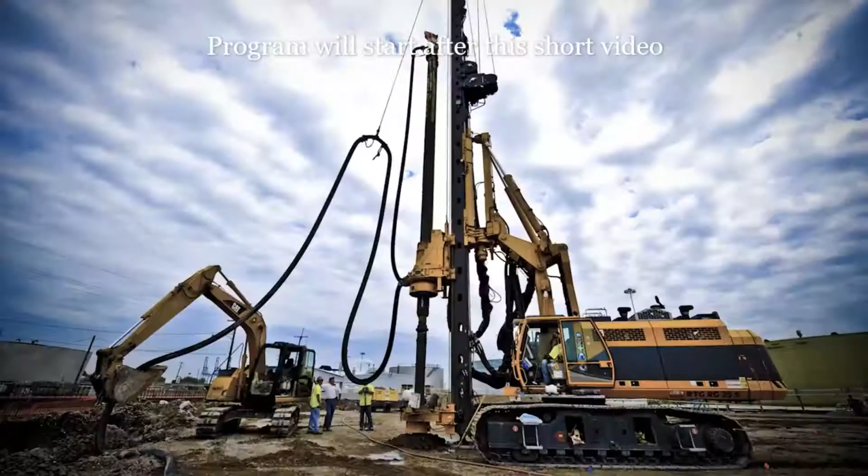It was about geotechnical engineering. With the engineering, I felt like I could actually touch the soil. And then after I got into a lab and got to go out on drill rigs, it was so much based on experience and what you have seen and how that soil behaves. It's not going to be the same every single time, and so there's always a challenge with it.

It's a great industry for people who like new things that pop up underground and who can deal with changes as they happen. So it's rewarding and always full of new things.

We definitely get the opportunity to be designer and builder all in one, and not everybody has that offering. Not every engineer has that ability in the pathways that they choose.

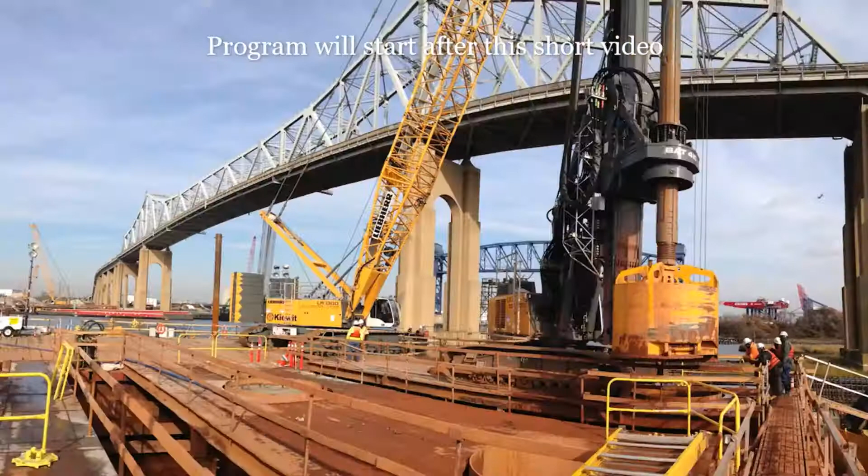It's very satisfying. Most of the work we do is never seen, but it's still satisfying to drive over a bridge knowing that I've had a hand in constructing it, or looking at a high-rise building, any beautiful building, knowing that deep below the ground is my contribution to that structure. It's just a very satisfying feeling.

It's a very big industry, so you have a great opportunity to advance and to be able to move forward in your career and become valuable to the industry or the company you're working for.

What I like about soil is that it's sort of a mystery below the ground, right? You only get to see a little bit of it at a time and then try to interpret what's going on. So it's sort of a puzzle that you're putting together.

DFI continues to expand globally as regional chapters grow and reach more practitioners with content that meets local needs and goals. Regional chapter leadership is steady, and local staff are dedicated and enthusiastic, liaising productively with DFI headquarters.

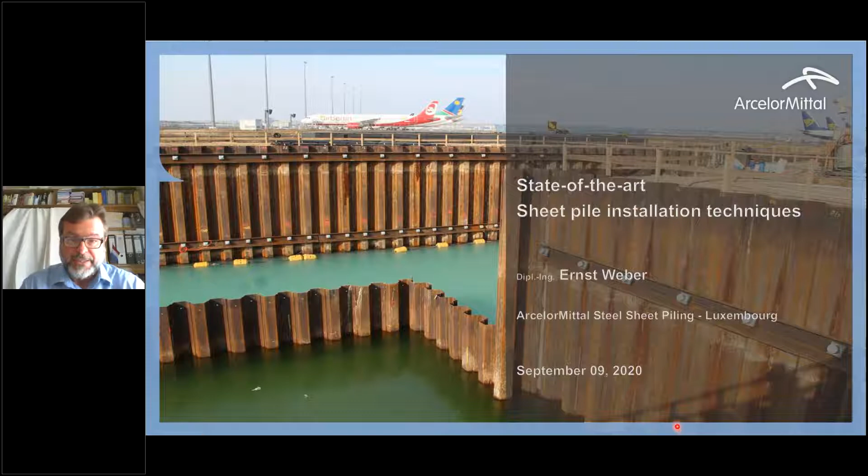Okay, let me just get the laser pointer. Hello everybody, our session today will be on the topic of state-of-the-art sheet pile installation techniques. There's quite a lot to talk about, so sometimes we will touch only the surface, sometimes we will go a bit deeper. I invite you to ask a lot of questions, or after the webinar if there is more to be clarified, just contact us, we will help you.

The picture we see here is a sheet pile job we did 2 years ago at Frankfurt International Airport. It was the construction of a new terminal, and because of very high water tables and changing geometries of the underground structures, around 3,000 tons of sheet piles had to be installed. Some of them stay in the ground, some had to be extracted about a year or two later to be reused on different job sites. That's a very important thing we will learn today, that sheet piles are very versatile and we can use them over and over again.

Just to give you a quick figure: every hour on every day, all over the world, around 1,000 linear meters of sheet piles are installed, be it new or used sheet piles, 1,000 meters per hour on average all over the world. That shows how big the use of sheet pile is everywhere. It's a very important construction product.

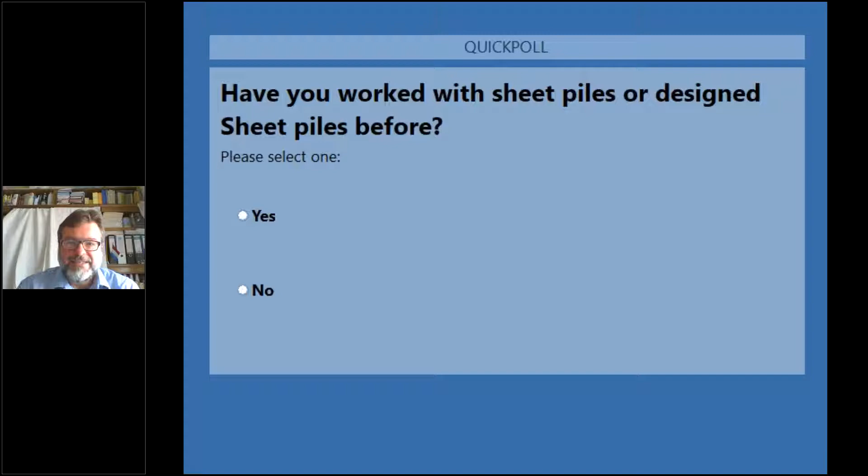That brings me to a very interesting question: who of you has ever worked or designed with a sheet pile? It's interesting to know what audience we have today. So I guess we will have an answer quickly. Okay, nearly 60% have already experience with sheet pile and 40% do not. Well, let's see that after this webinar, the number of sheet pile users will definitely grow. Thanks a lot for this quick poll.

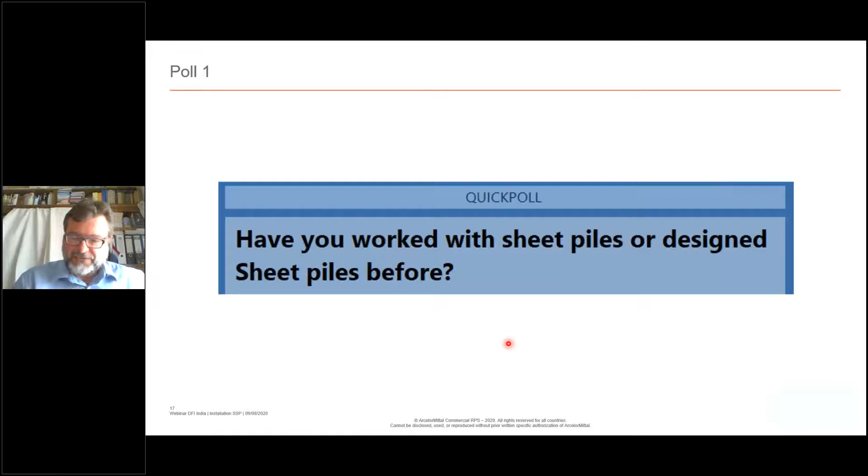Today, we are much more advanced. So when it comes to construction with sheet piles, the first thing we do is we calculate. We need to know what kind of section modulus, what length we need. And then the second important thing is the piles we have calculated must be installed in the ground. This can be just as challenging, or even more challenging, than the calculation of the project.

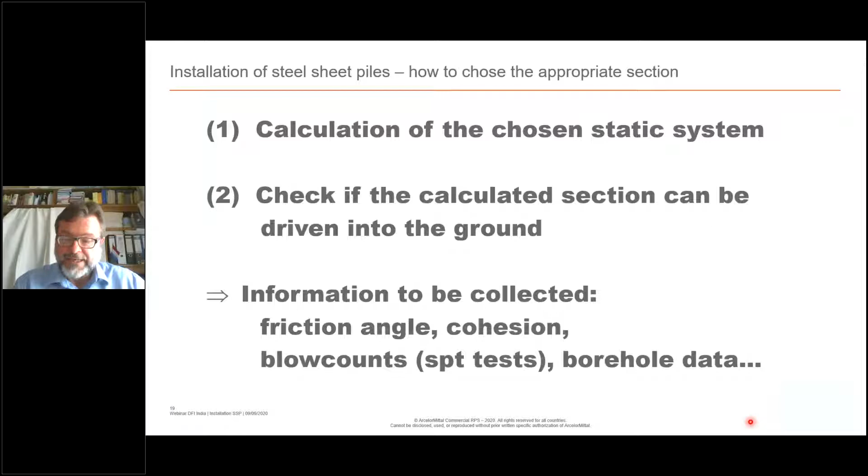So we need as much information as we can get on the soil, like friction angle, cohesion, SPT or cone penetration testing, borehole data. As much as we can get, to evaluate the right methodology and the right equipment.

Basically, we have two types of soil. One is granular soil, like sand and gravel. That's perfect for vibrating, because when vibration of the pile starts, the soil is more or less liquefied temporarily, and the pile slides into the ground. After vibration is finished, the ground settles again, and we have a pile that's fixed and will not move anymore. The other big soil type is cohesive soil, like clay, silt, silty sand.

That can be very challenging to install piles. Here, the use of an impact hammer is normally very good, or very strong normal frequency vibro hammers can also do the job. We can also install sheet piles in rock, but that's a different topic we will not touch today. We can do another seminar on that.

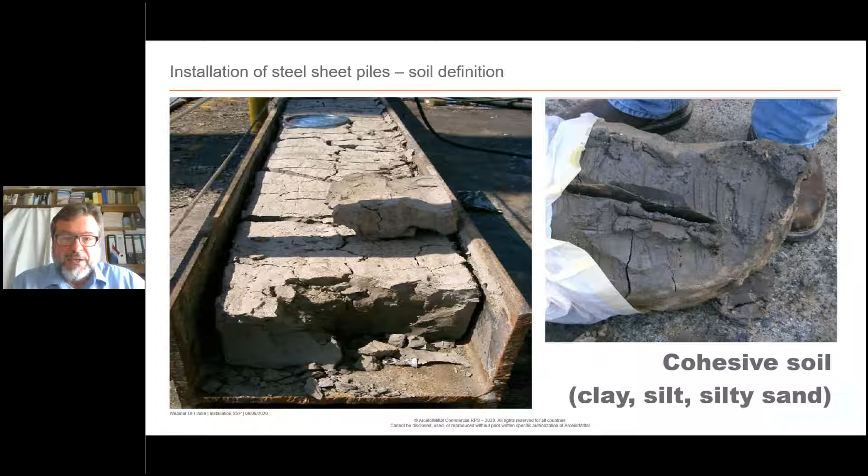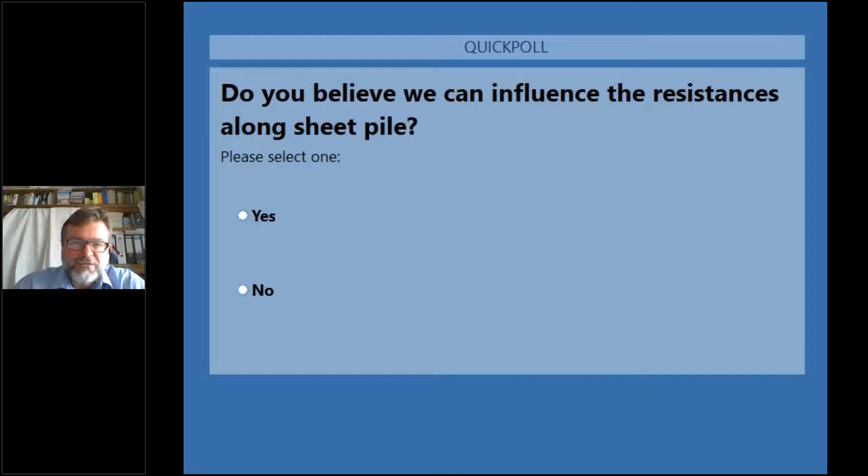As we already have 60% of participants with some sheet pile experience, let's see what the other 40% say. The interlock friction, the point resistance, and the skin friction of the pile — can we influence that? Do we have any chance? Let's see what the result is.

Oh, I'm very happy — nearly 90% say yes, around 10% say no. Well, yes, we can influence it. That's why it's so important to know the resistances, because we can work with them.

Point resistance — how can we influence the point resistance? For example, by choosing a single or a double pile. We increase the point or we make it smaller. We can do pre-drilling to break up the ground before the pile tip. This all reduces the point resistance.

Yes, we can influence it. Skin friction — can we influence the skin friction of a pile? Oh yes, we can, quite a lot.

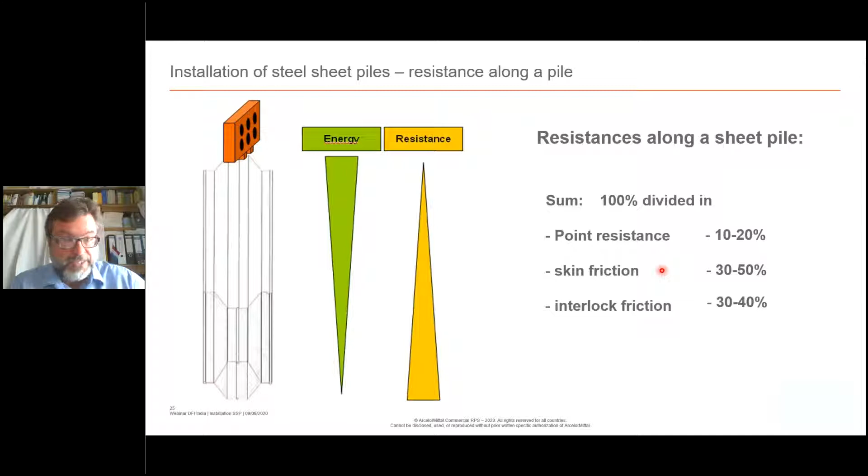We can go for a single or a double pile. We can do water jetting, for example, which is lubricating the ground, and the pile is sliding in with much less friction than if we would just drive it dry.

Then comes a very important point: how can we reduce the interlock friction? We can use grease, for example. Before piling, we just put with a little brush standard ordinary grease into the interlock, and this will help reduce friction quite a lot. We can use bituminous filling materials, or even simple soap can reduce the interlock friction a lot. So it's very important to know where the resistances are and how to deal with them.

When we go to actual sheet pile installation, around 70% today is done with a vibro hammer. It's the quickest way of installing. It's very versatile, you can use it everywhere, and the speed of execution is the big advantage. We had job sites where up to 100 linear meters of pile wall was constructed in just one day.

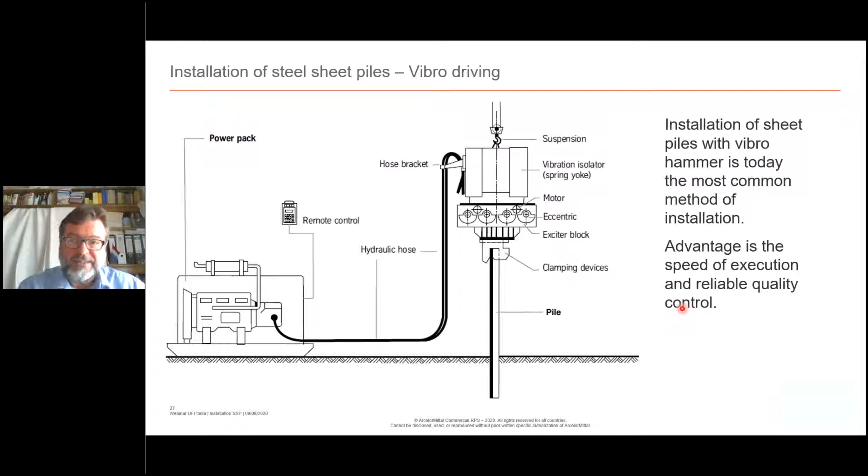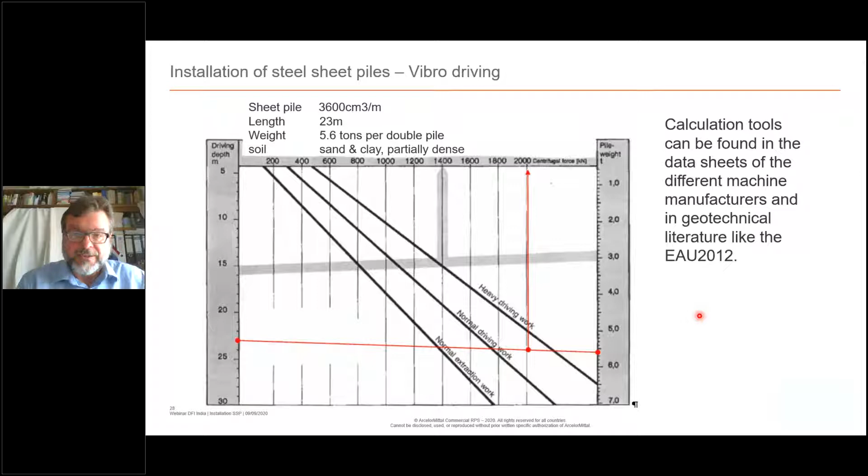For example, in the recommendations of Waterfront Structures, the EAU 2012 is the latest version. There are also recommendations on how to dimension the piling equipment.

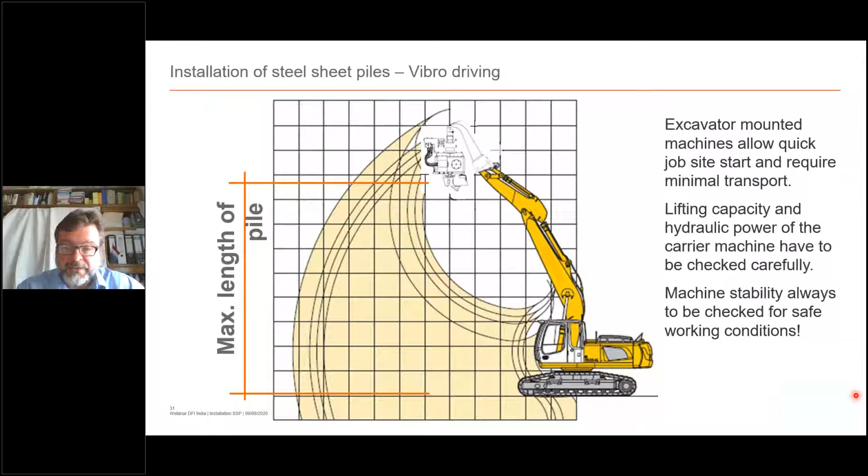And for sure, what always has to be checked is the machine stability, that we do not overload and the machine does not tip over. Safety is always the most important thing when it comes to a piling job site.

If we look at bigger job sites, then it can be very beneficial to use these telescopic leader rigs. We have here normally a high frequency hammer and a hydraulic mast that can develop a certain pushdown force.

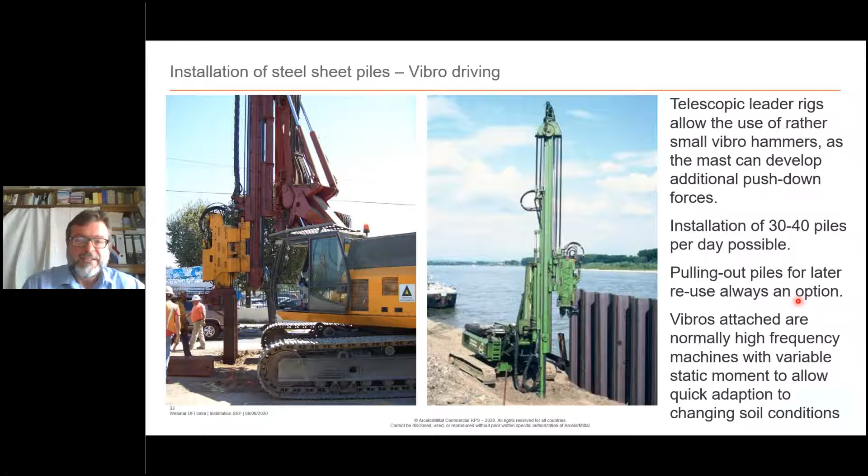This allows us to work with a rather small vibro, because the machine itself can give additional energy to get the piles in the ground. We had job sites where we installed 30 to 40 double piles per day. This machine has a crane equipped in the mast, so you don't need auxiliary equipment. Just one machine and 3 to 4 guys, and you can do 30 to 40 double piles per day easily. The high frequency vibro that's normally attached allows adapting quite easily to changing soil conditions. These are really state-of-the-art installation machineries.

That can be very important for the installation of huge anchor piles in offshore quay walls, for example. If we install the piles, it's very important that the guiding of the piles is absolutely accurate. As we've seen before, the interlock friction is a major part of the resistance along a sheet pile, so we have to make sure the wall is as straight as possible. If the piles are bent or leaning in one direction, we immediately increase tremendously the skin friction and interlock friction, leading to problems in the installation.

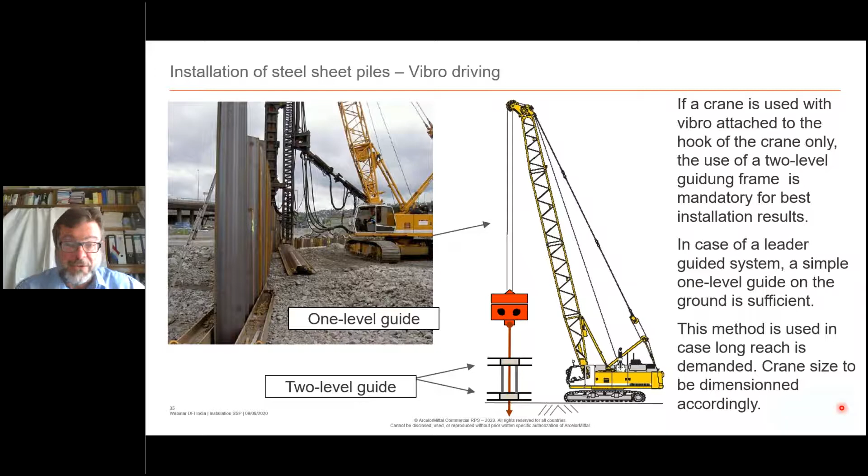Also very important is the crane dimensioning. When we work with a crane, we have the big advantage that we can work at a certain distance from the crane with the sheet piles. That can be, for example, when you work on a quay wall and have to reach out 10 meters into the sea—this methodology can be very good.

So what do we have to consider? We need to know the pile weight, the vibro weight, or hammer weight if we use an impact hammer. We need to know the weight of the guide frame, because that also has to be lifted by the crane. And we may have to consider combined lifts—we have a pile installed in the ground, but maybe in the wrong position, so we have to pull it out again. That's vibro plus pile weight plus soil tension, which has to be considered for the crane dimensioning.

Very important, but that's the good thing about sheet piles: we install them, and if we find out something's wrong, we just pull them out again. That's the only material that allows you to do so. For the crane dimensioning, it's very important to know the working radius—how far away from the machine we have to work with the pile and the vibro—because that's a big influencer on the size of the machine.

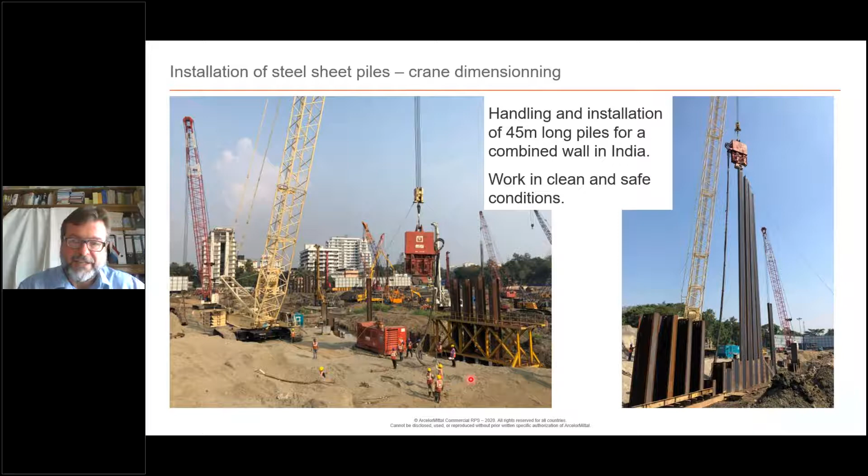This should move further now. Can you please go one slide further? Seems like mine is not. Okay, very good, thanks.

When we use an impact hammer, it's very important to use the fitting driving cap with it. We see here that's the counterpart of the clamp at the vibro driving. We have a helmet covering more or less the full shape of the sheet pile, but leaving out the interlocks, so we can work with this driving cap in between a wall. And if one sheet pile does not go down with vibro hammer, we can always switch to impact hammer driving, which will normally lead to full penetration of the sheet pile. Details can be found at machinery manufacturers or also at the sheet pile manufacturers.

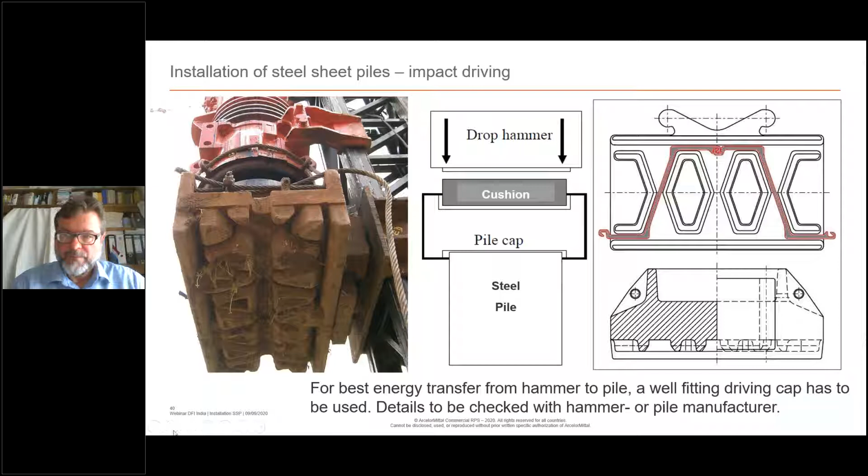Very important when you do piling is not only what material to use and what pile to use, but also when to stop. So we have to take a close look at the refusal criteria, which is clearly defined.

Can you go one slide further, please? Somehow my cursor doesn't allow me to do so.

We have certain recommendations, which is 5 minutes for continuous vibrating of a sheet pile. If the pile is not moving down after these 5 minutes, then you should stop piling. If you go on, there is a risk of damaging the pile or the machine. What can you do? Well, get a bigger vibro or move to impact hammer driving.

When we move to impact hammer driving, there is also a refusal criteria: 2 centimeters per 10 hammer blows. If you have reached that, it's a technical limit, and you have to check where you are. If you are only 5 centimeters away from your pile driving objective, then you have reached the technical limit. That's okay. If the pile is still sticking out for 2 meters, you have to get a bigger hammer.

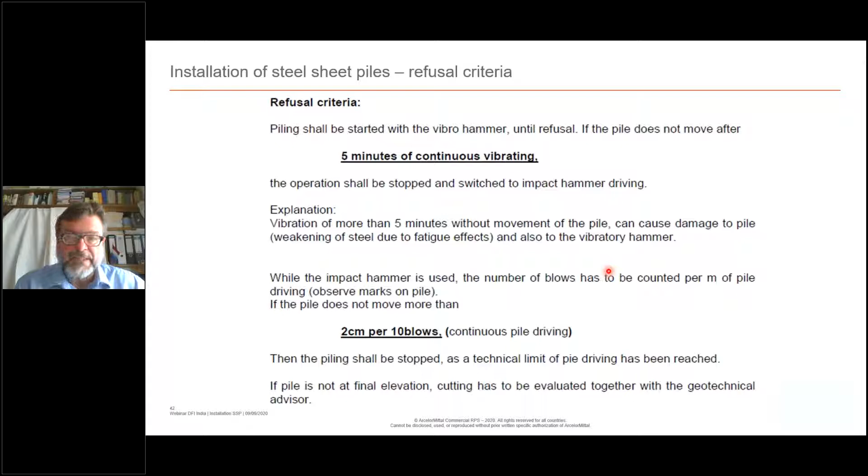Or you have to think of water jetting or pre-drilling just as an installation aid to get the pile down. But very important, if you go on with hammering and the pile is not moving, you will destroy the pile head, or worst case, the machine will face a problem. And very important, when you do a mix of these installation methodologies, always use vibro first and hammer last. Never the other way around, because a hammered pile is really sticking in the ground and you will not be able to move it again with the vibro.

Installation with low vibration is a very important topic today. In the old days, everybody assumed that sheet pile installation came together with very heavy shaking of adjacent buildings, but that is technology 30 years ago. Today, we have hydraulic pressing systems.

When we take a quick look into the historic development, we see that the first press was already constructed in 1958. It was Taylor Woodrow's Pilemaster that came into the market at that time, so already quite an old and proven technology. At the time, they had a pressing force per cylinder of 229 tons. Just to compare, today we are working between 80 and 120 tons. It had a stroke of 70 centimeters, which is quite a lot. It could work with single Z and U piles, pile width 500, 600 millimeters, which was the standard in 1958. And we had a machine weight up to close to 12 tons. It was working free hanging on a crane.

How is the pressing system working? That's what we see here. Basically, when we start, we have the weight of the machine and the weight of the panel of sheet piles that is to be installed. To overcome the resistance in the ground, we have to mobilize all these weights together, and we start pushing with 2 cylinders, normally starting in the middle.

We push the piles into the ground for 50, 60 centimeters, and we have the counterweight of the sheet pile panel and the machine that is giving the reaction force. Then we go on with the next 2 piles. The system should always be symmetric to make sure that we don't have any leaning in whatever direction. And the deeper we go, the more friction we develop along the pile. So this additional friction is also adding up resistance, so that the deeper we go, the pile is held by the ground more than by the machine and the weight of the other piles.

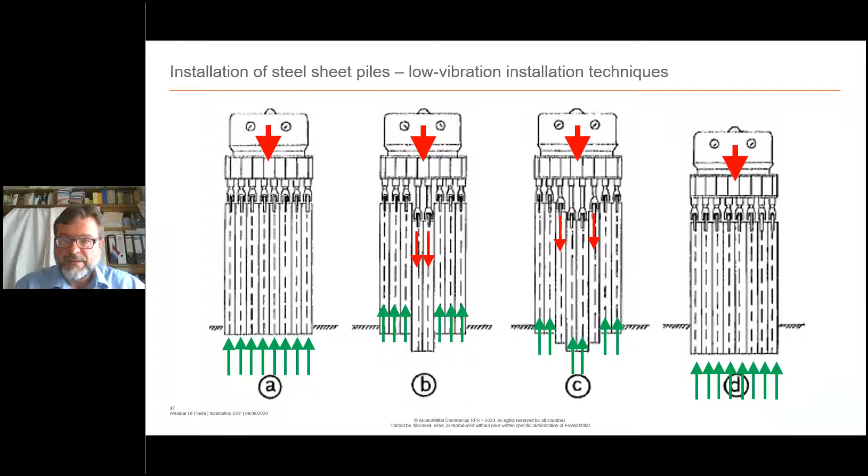In the 1970s in Japan, they invented special presses that used the already driven piles to walk on them. Japan, very highly populated, very dense housing and not much space, so they needed a system that was able to work with the least space possible. That's where these self-walking presses came up. They press one pile after the other, and the reaction force is given by the piles already driven in the ground, so it's like an ant crawling over the sheet pile line that it has created.

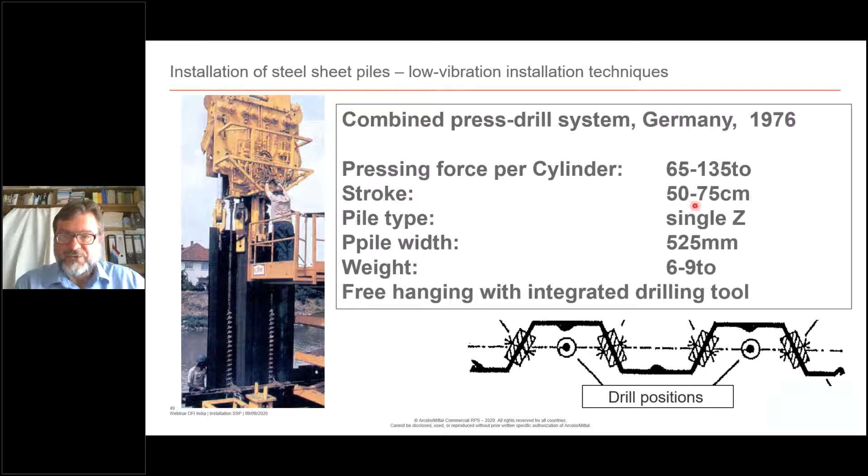In the mid-70s, there were some guys in Germany doing inventions and testing with a combined drill pressing system. We have a 4-cylinder press machine that also had an auger, or 2 small augers, fitted on the machine, so you could press and drill at the same time. It was possible to use single Z piles, and it had a stroke of 50 to 75 centimeters, about the same as we face today.

If we look at today's pressing systems, we normally find these leader-guided machines. We see here the same hydraulic leader we had some slides before with the Vibro. We have a 4-cylinder press. In the beginning, the machine weight is the counterweight for the installation, and the deeper we go into the ground, the more the ground friction builds up.

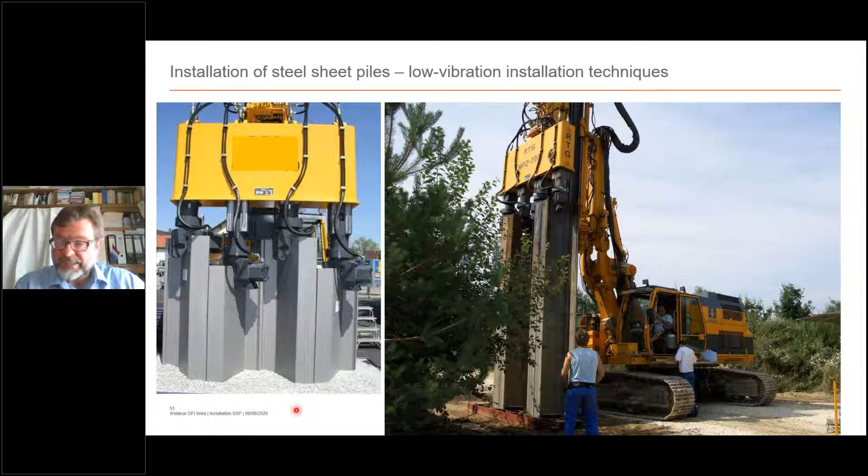Here we see the different setups for a pressing system, for Z piles and for U piles. The U piles demand a little more machine engineering, while the Z pile press is rather a straight line. As it's hard to imagine in theory, we have a small film that illustrates how pressing is done. Please show the film now.

A foundation pit had to be excavated for the construction of a sports shop subsidiary in the city center of Constance, Germany. The foundation pit retaining wall was installed using AZ46 ArcelorMittal sheet pile profiles with lengths of 10 and 11 meters. The profiles will remain in the ground.

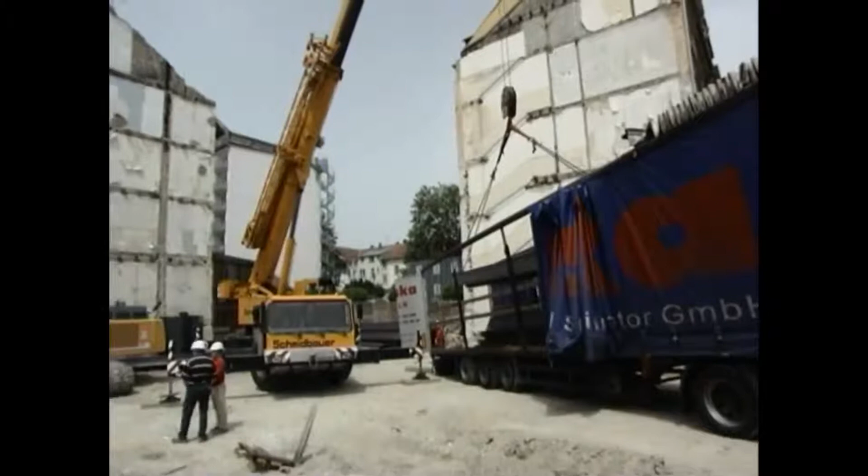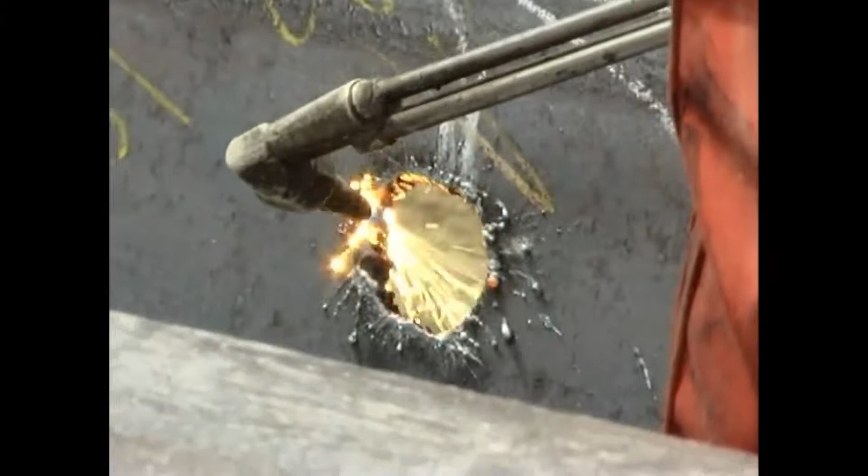The stipulated installation method was vibration-free pressing, since the adjacent buildings were in extreme danger of collapsing. The contractor decided to use his Liebherr piling and drilling rig, type LRB 155, equipped with a Liebherr BVV sheet pile presser, type 4080. A special feature of this model is its ability to work with both U and Z profiles. The sheet pile profiles were supplied as double sheet piles and were connected to panels of 4 sheet piles on site, which were subsequently pressed into the ground.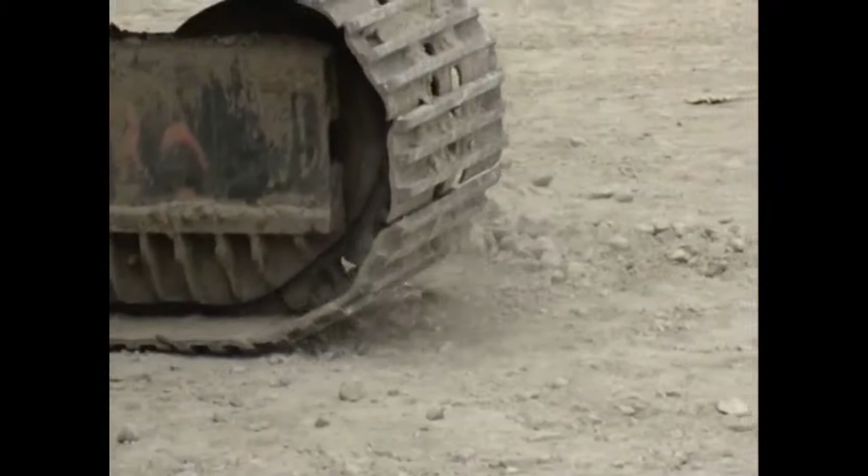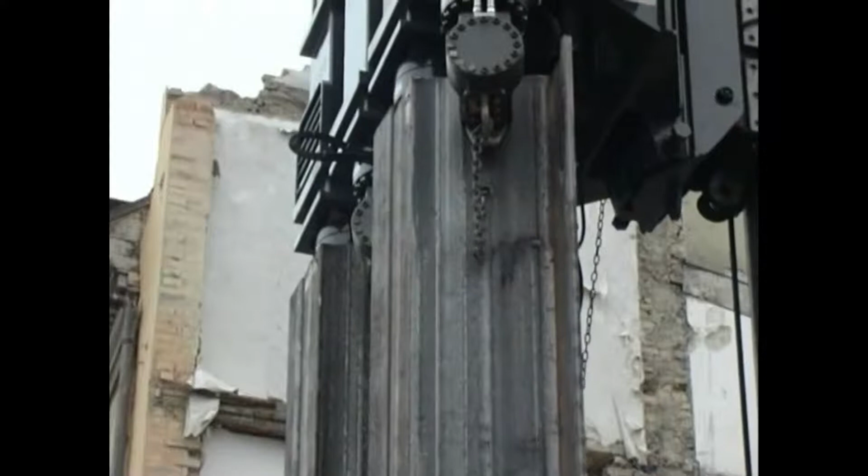The carrier machine's dead weight and the downcrowd force supplied by its universal slide usually allow for an immediate installation advance before the actual pressing process has even started. Several meters can be achieved depending on the prevailing soil conditions.

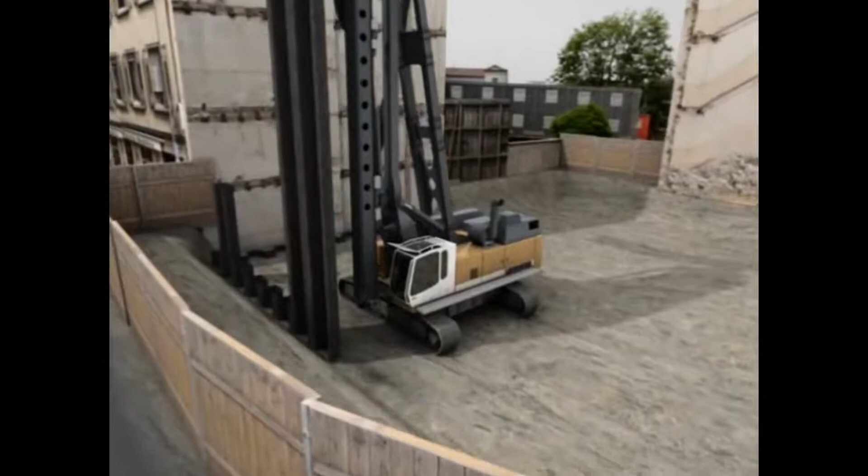Interlock friction should be reduced during the pressing process. For pressing the sheet piles into the ground, they have to be guided in the lower section to guarantee correct alignment. The guiding tongs should consist of strong double T beams and be arranged on the ground. The free flange end of the sheet pile panel is guided by a guide block during pressing, which prevents the sheet pile from turning within the guiding tongs. Greasing of the interlock also helps reduce interlock friction.

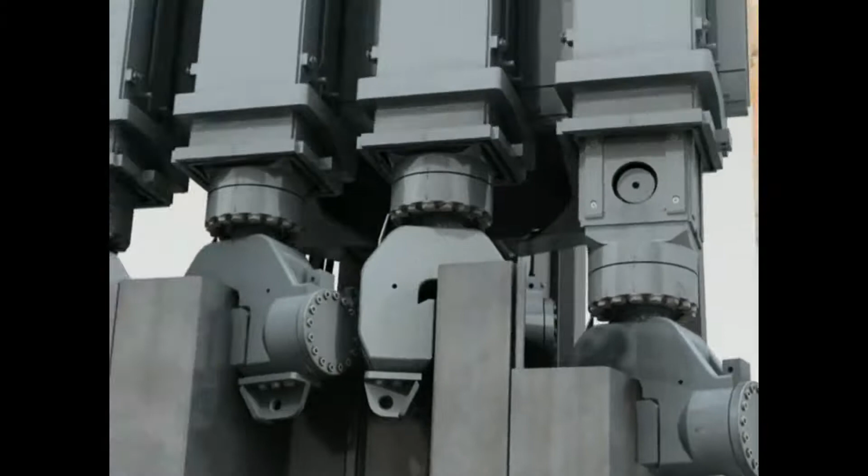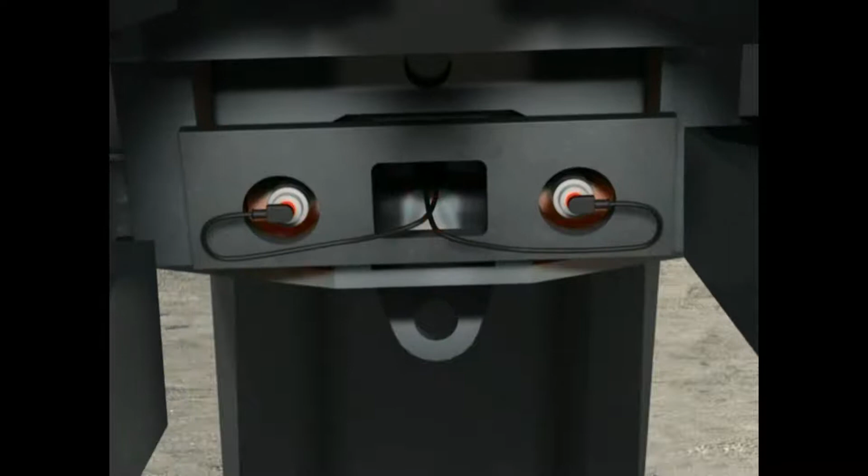Another special feature of the Liebherr BVV sheet pile presser is the system of torque monitoring. This system automatically stops the pressing process if the bending torques resulting from the pressing process exceed those which can be absorbed by the carrier machine. This provides utmost safety for the carrier machine and the leader.

The actual pressing process can be controlled automatically as well as manually. One or two pressing cylinders work alternately until the sheet piles are installed to the required depth. In this alternating pressing method, the skin friction forces of the stationary piles are used in addition to the weight of the carrier machine. All working processes are monitored by the Litronic control system of the LRB, displayed on the monitor in the operator's cab, and transferred to the Liebherr process data recording system. The data can be printed or stored on a memory card or a PC.

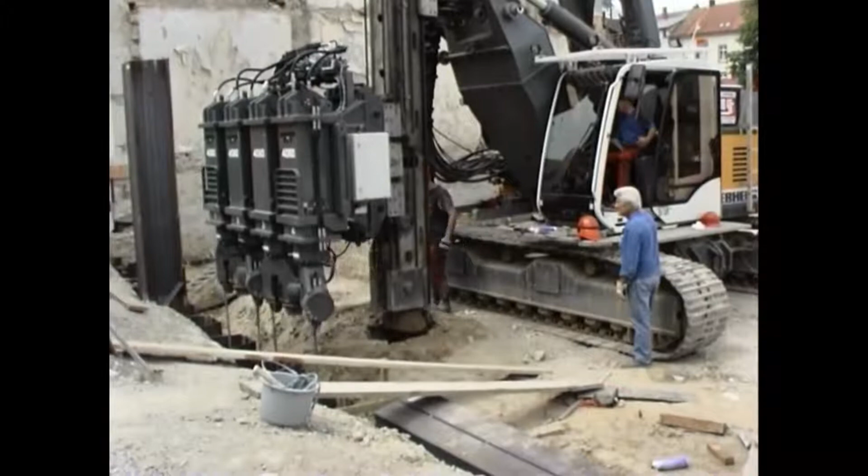The pressing method using the Liebherr BVV presser is equivalent to traditional vibrating or impact driving methods in terms of application potential and handling.

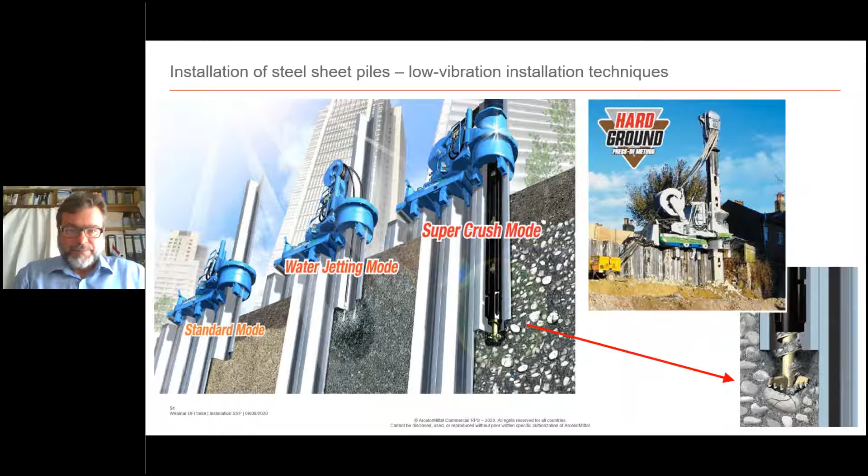When we work with these kinds of presses, we have the same tables and nomograms that allow the user to choose, for a given soil condition and a given sheet pile, for example Z pile or U pile, the right machine and the right methodology. Here, for example, standard pressing. If SPT goes higher than 20, we can use water jetting, and above 50, super crush mode or pre-drilling would be the perfect way to go. So depending on the soil condition and the machine we have, we can choose the right installation methodology.

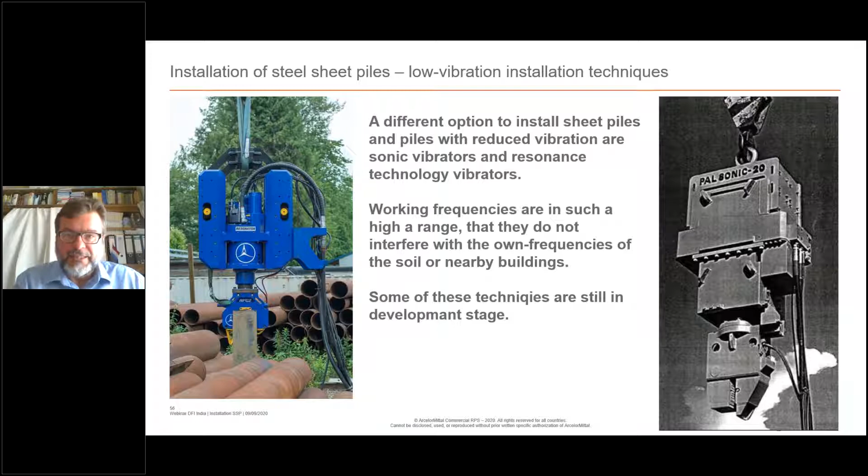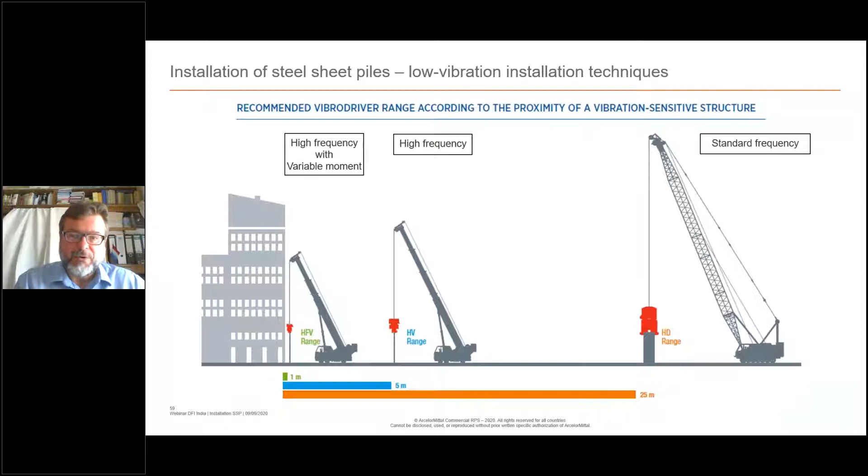What else can we do to reduce vibration? I told you before, around 70% of all sheet piles are installed with vibro hammers, so the choice of the vibro hammer is very important. With a heavy duty standard frequency one, we should stay at least 25 meters away from structures. If we have to go very close to buildings, we can use high frequency machines, or the latest ones, high frequency with variable moment, which allow you to work within 1 meter of the foundation of the next building. So the choice of the right vibration equipment is very important.

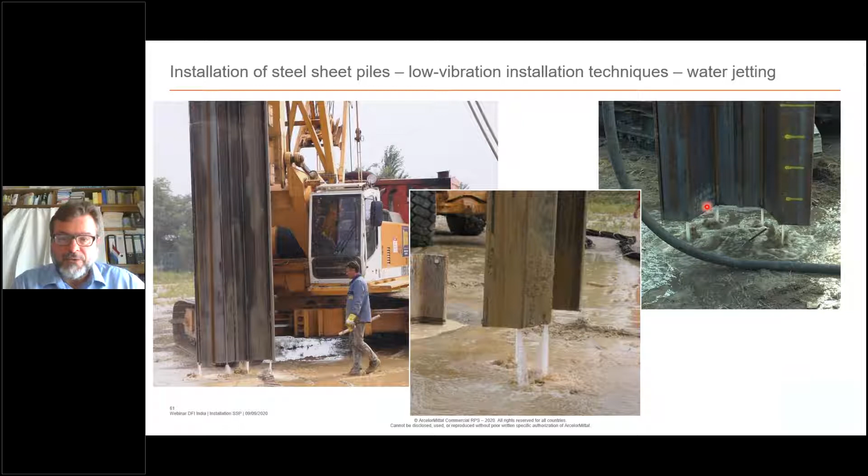We can use water jetting to reduce toe resistance - remember the resistances along a sheet pile we discussed before. It lubricates the pile, reducing skin friction, and we can combine it with toe strengthening plates or other methods. It's very important that the water flow is very little and very controlled. We see here 2 jet pipes per sheet pile, so 4 on the double pile. If we use huge pipes, we create erosion in the ground, which we don't want - we just want to lubricate a little bit. We have a little film to illustrate this too.

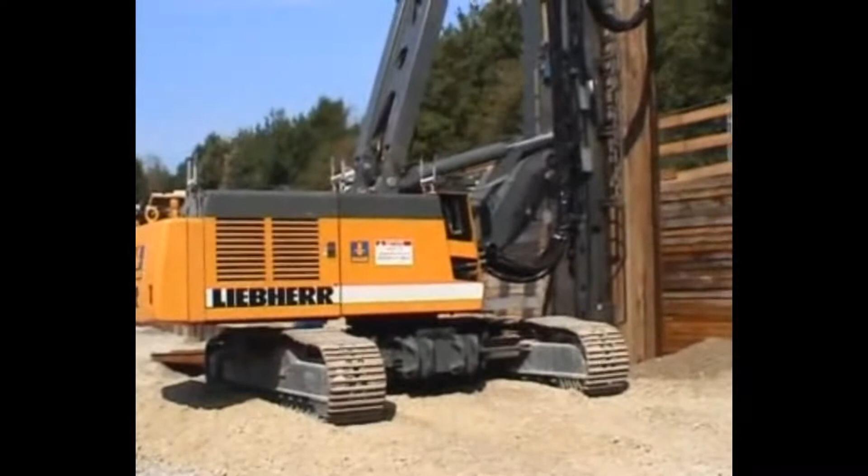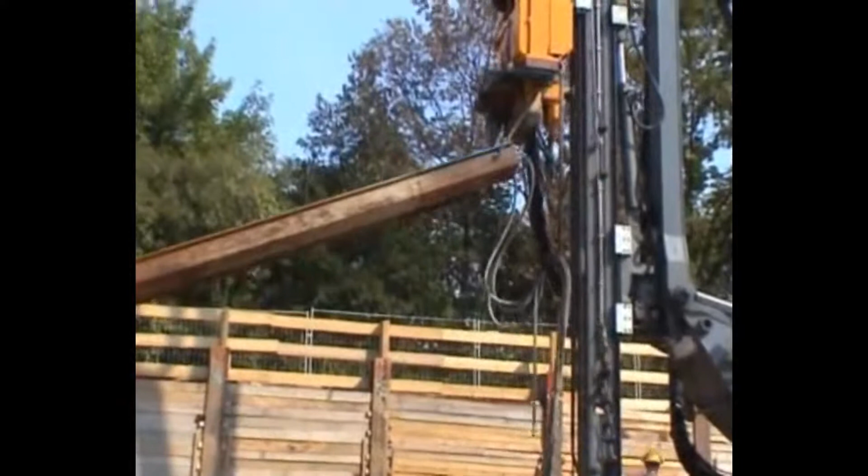Today, vibrating sheet pile walls is a common method, especially in inner city areas, for stabilizing excavations against soil pressure. The technical parameters of vibrator and sheet pile walls make this method of construction more transparent than other methods. With careful working methods, basic machines and vibrators of modern design are synonymous with low noise and vibration levels, faster job completion, and consequently in harmony with ecology and economy. The vibrator, in this case equipped with a sheet pile feeder, is positioned on the sheet pile and sets the sheet pile and adjoining soil in vibration, shifting the latter. Peak pressure and skin friction diminish and the sheet pile penetrates the soil.

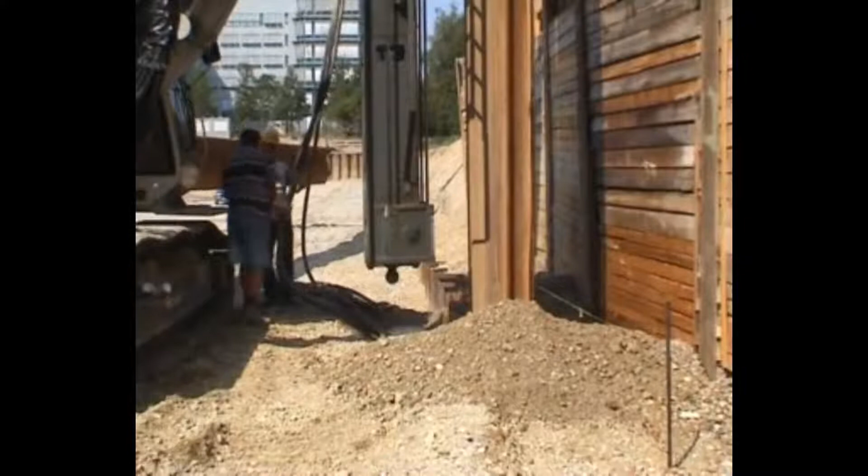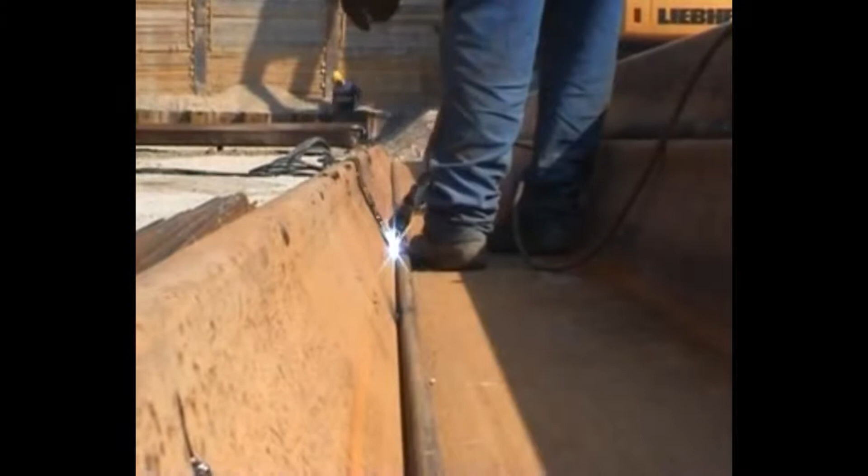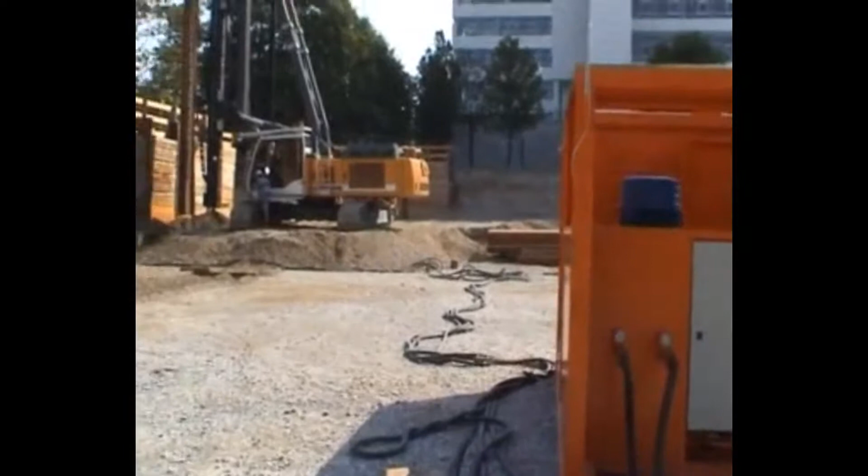Jetting-assisted vibrating belongs to the category of installation aids and is used as a supporting measure for the installation of sheet piles, beams, and pipes. It is a successful method to reduce the peak pressure of the vibrated element, as well as skin and lock friction, and to break up the adjoining soil. Moreover, vibration time is shortened and the vibrated element is protected from deformation. Machine overload is prevented and soil vibrations are minimized. The number of jet pipes mounted on the sheet pile depends on the soil condition. The BVV jetting system consists of a water tank, rotary pumps driven by powerful electric motors, and an elaborate electronic control. The jetting system is remote controlled.

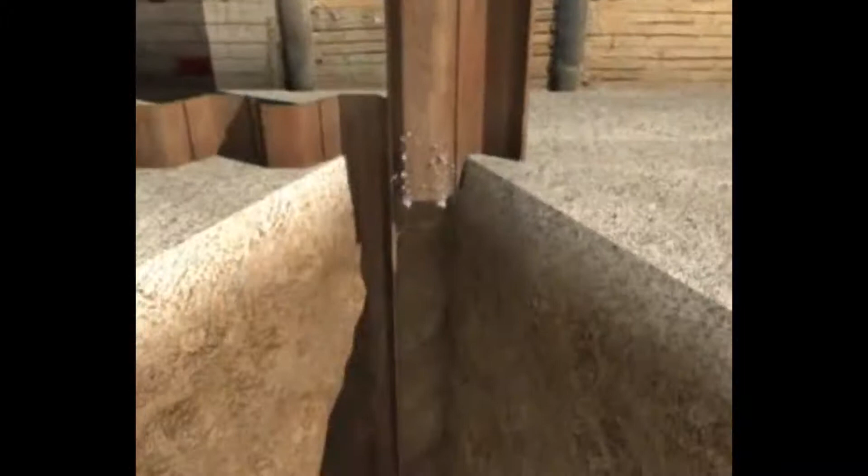The jetting at the bottom of the sheet pile results in the loosening of cohesive soil layers, a shift in granular soil layers, and the creation of a water film along the sheet pile, functioning as a lubricating film and ensuring better progress of the vibration works.

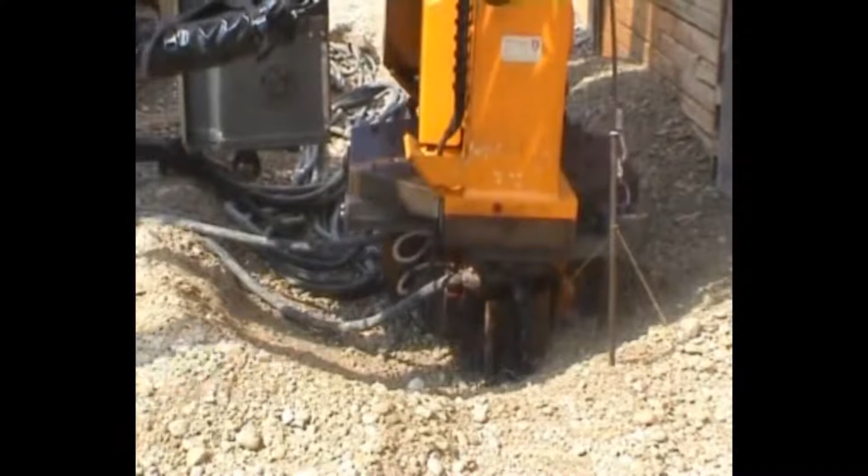If certain criteria, for instance the choice of the vibrator, the number of jets, the amount of jetting water, and the jetting pressure are adhered to, the sheet piles can be installed even in very compact and changing soils. Supported by jetting-assisted vibrating as an installation aid, it is possible to economically penetrate soils which were considered impenetrable through vibration until only a few years ago.

So that was the water jetting. In case we have hard ground conditions, maybe some rock layers in the ground, or if obstacles, boulders, or old trees are known to be encountered, we can always use the pre-drilling method to work around these obstacles. So we open a hole in the ground, normally at the area of the sheet pile interlock, and we destroy the obstacle or push it away, and sheet piles can be installed.

Let's go to the next one. A very important question that comes up from time to time is submerged piling. What can we do when we have to install piles underwater? Well, basically two major ideas. Option 1: you check what vibro you have and check with the manufacturer whether this vibro is capable of working underwater, and quite a lot of them are. So that has to be checked with the manufacturer. You just lower the vibro with the pile below the waterline and you can install your sheet piles.

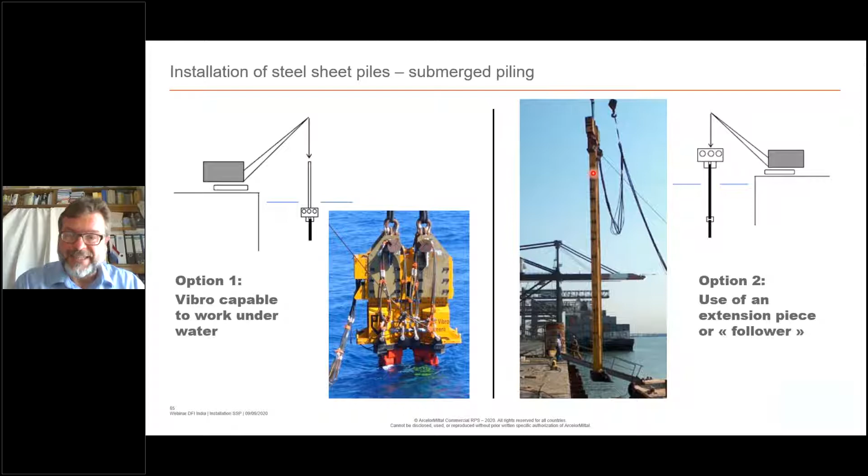A very important topic when it comes to sheet pile driving is quality control. When you receive the piles from the mill, you already get a certificate, so you have controlled normed material specifications, which are easy to control and are certified.

And then when it comes to the job site, vibration monitoring is surely a very important topic. The DIN code that deals with vibration impact on structures, DIN 4150 part 3, gives recommendations, for example how far away you should stay with your piling works from the foundation of a building, depending on soil condition. If it's cohesive or non-cohesive soil, you can assume that at a certain distance no harmful vibration will happen.

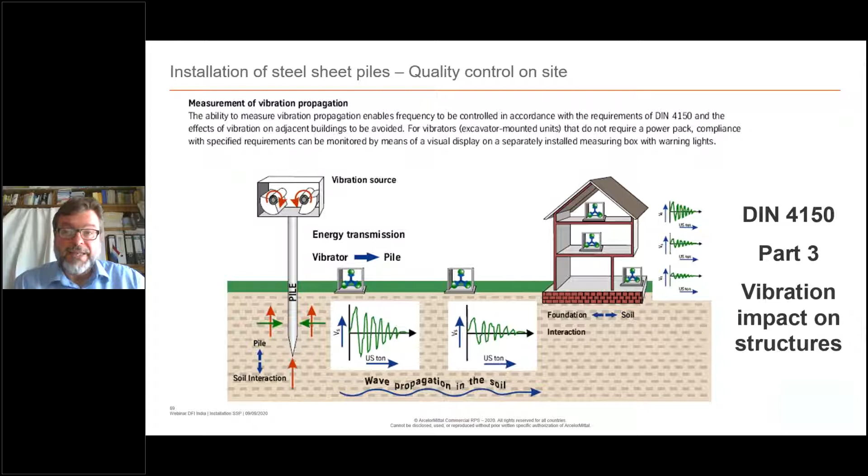But today we are much more advanced. We can equip either the ground or the whole house with measurement devices, and when we vibrate quite close to this building, let's say within half a meter, we can measure the wave velocity coming to the house, and in case it exceeds predefined values, we can always stop piling works. This is very easy to do.

Here we see, for example, one of the measurement devices. It records the wave velocity at this point, and you see here we can vibrate quite close to existing walls. This will give a signal in case something is out of the ordinary, or if the measured levels exceed the predefined ones. Then the driver gets a signal and has to stop, and they can think about what to do, either change the vibration methodology or change the vibration setup. So quite easy to deal with.

The same applies for the wall integrity.

Once we have the piles in the ground, say 10-12 meters deep, it's impossible for us to see how the pile looks. So we have this checking tool that can be mounted on the sheet pile. We have this little bolt attached to the driven sheet pile, and when the next pile comes down and reaches the position of the bolt, it shears the bolt off. With a little control box 10 meters up in the air, the foreman on site can easily check that the bolt is sheared off, the interlock is connected, and the pile and wall are okay. This is a very easy method of controlling on the job site that the accuracy of the piling is correct.

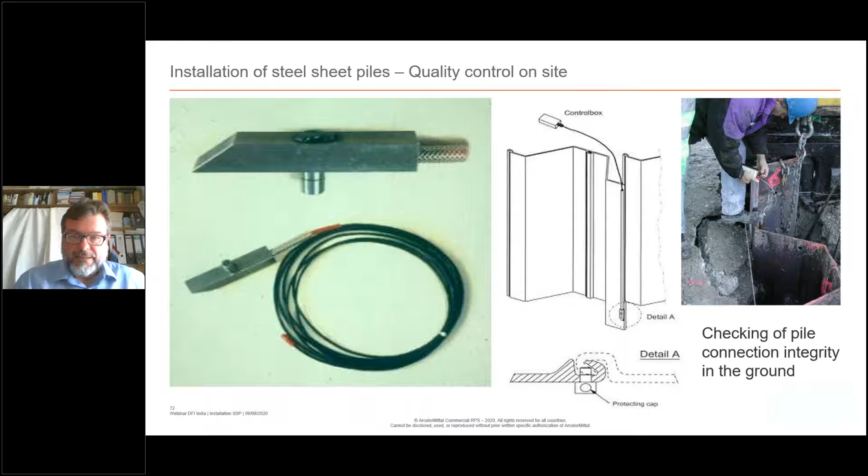Can you move one further, please? We do a lot of projects in maritime areas, a lot of excavation projects, and sheet piles for dikes and flood protection. But sometimes we do different things. What I show you now is a project that's actually going on right now in Munich. It's a temporary house which will be used as a theater.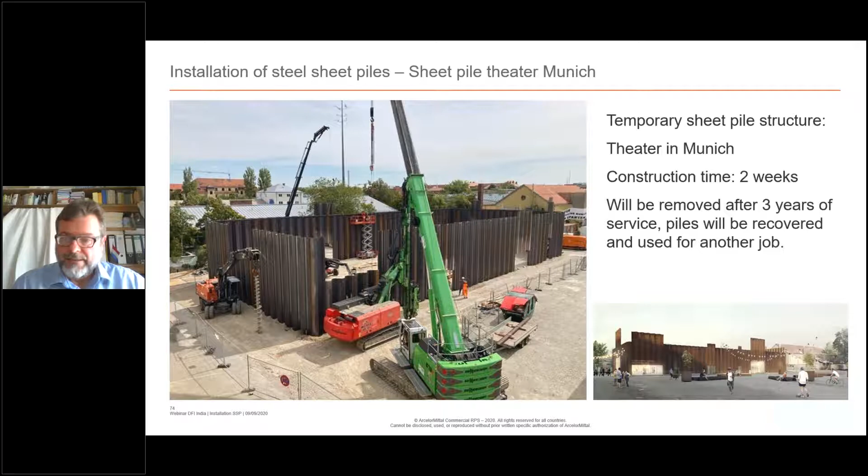So let's see, where can you find written recommendations on sheet pile installation? Just to mention a few: the Eurocode 12063, which deals with execution of sheet pile walls. It's the technical code for sheet pile works with a big annex giving examples of how to handle and install, a very good reference code. Then we have recommendations for waterfront structures, the EAU, chapter 8 deals completely with sheet piles. It's around 150 pages that tell you everything you need to know about sheet pile structures and the maritime business.

Then we surely have piling handbooks from the different sheet pile manufacturers, so you can contact the manufacturer and ask for help anytime. And we also have machine manufacturers that offer catalogs and brochures, like you saw in the presentation, for the dimensioning of equipment. They are all eager to help in case of doubt. So there's a big source of information in case you want to use sheet piles and you're not sure, you can always come to the manufacturer and ask, we will be glad to help you out.

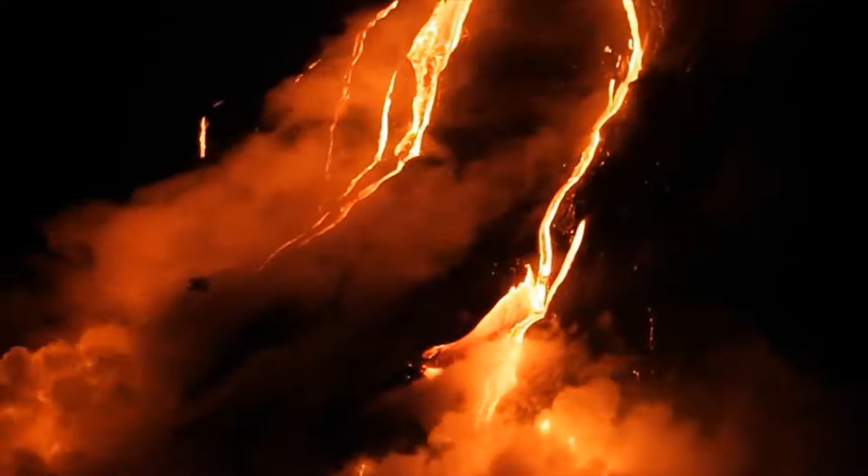My origin is somewhere in the depths of the earth, and my story began billions of years ago, when I was born in a blaze of fire. I helped you survive through the ages. I've changed the way you work, and I've changed the way you live. I've been part of mankind's greatest achievements.

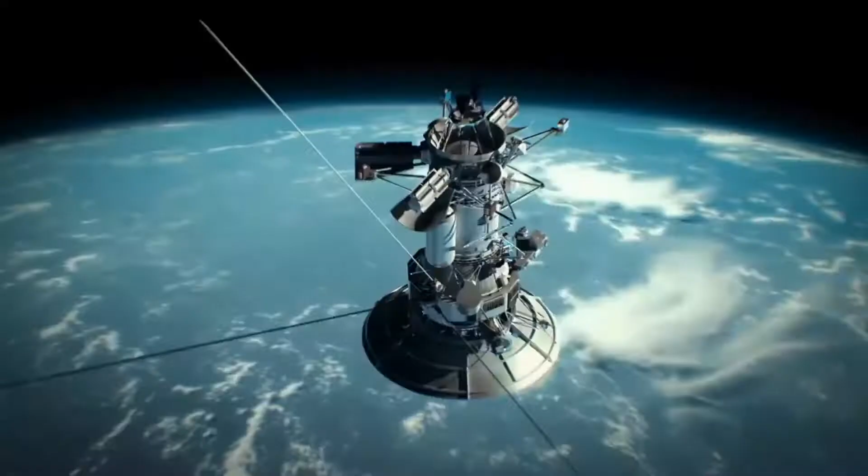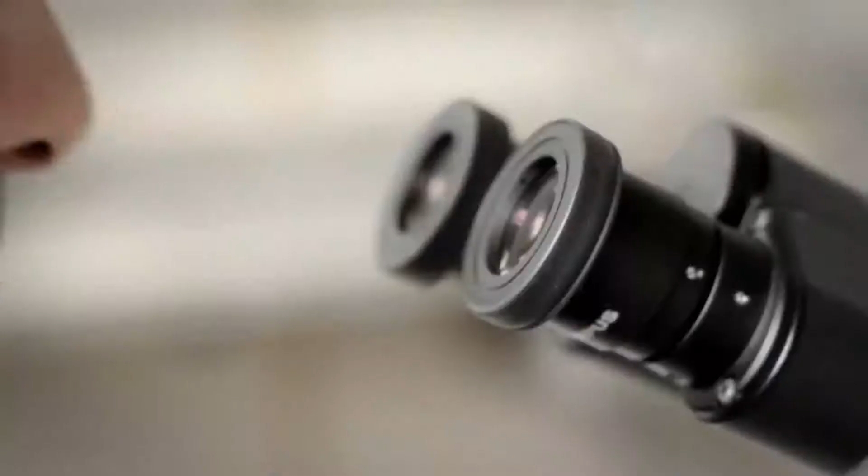I allowed you to expand your frontiers, to explore the land, the water, the skies, and even the universe. Throughout the centuries, I was reborn again and again. I'm known for stability and strength. My quantity is measured in millions of tons, but my quality is defined in millionths of an inch. I've stretched the possibilities of human imagination. I've inspired you to shape your visions and reach new heights.

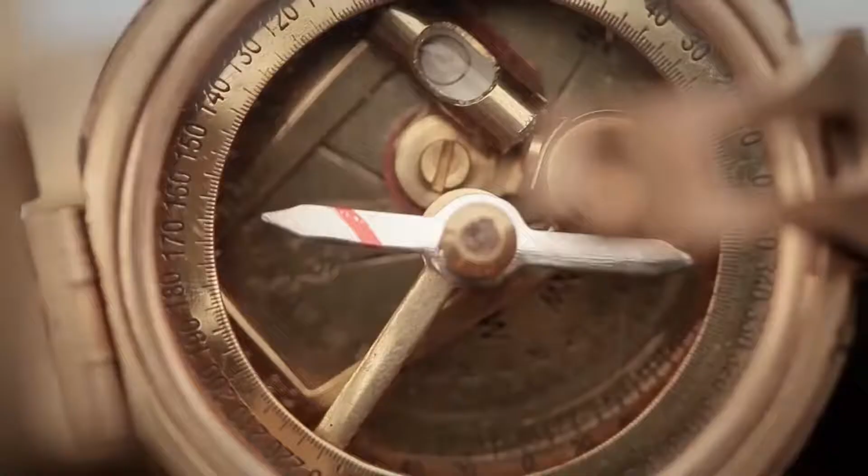Once I'm back to where I came from, I can become virtually anything you can imagine. I am more versatile than I have ever been before. I'm always with you. I'll protect you and guide you. I'm all around the globe, wherever you go. I'm everywhere and will always be. I am the engine of innovation. I am the pulse of the modern world. And you'll build your future on me, because I am steel, the fabric of life.